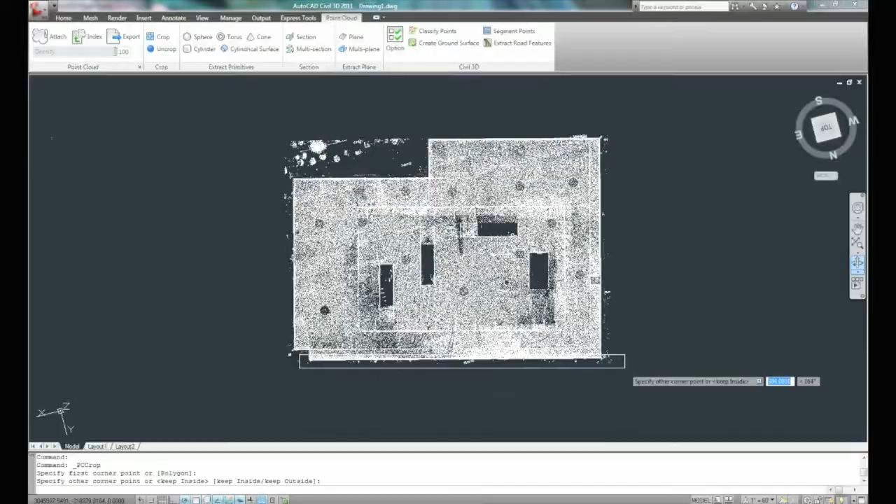What it results in is a point cloud of three-dimensional locations. And we're designing software technology to take that point cloud and turn it into a model—for instance, scan to BIM, scan into a building model, or into a part model for manufacturing.

This is the way a point cloud used to look just a few years ago. You couldn't tell if this point here is the column or the wall behind it. It was hard to visualize. But the technology has been advancing so rapidly, we can do this now.

We can experience millions of points as if they're surfaces. We can convert them into models very easily, rapidly accelerating the process. Every text tag you see here is a different laser scan from a different vantage point, and you're interactively moving through huge amounts of data. This is billions of points—they can't fit in your computer's memory.

They are being real-time accessed and streamed to your display as an interactive model, down to centimeter accuracy. Imagine entire cities at this level of detail.

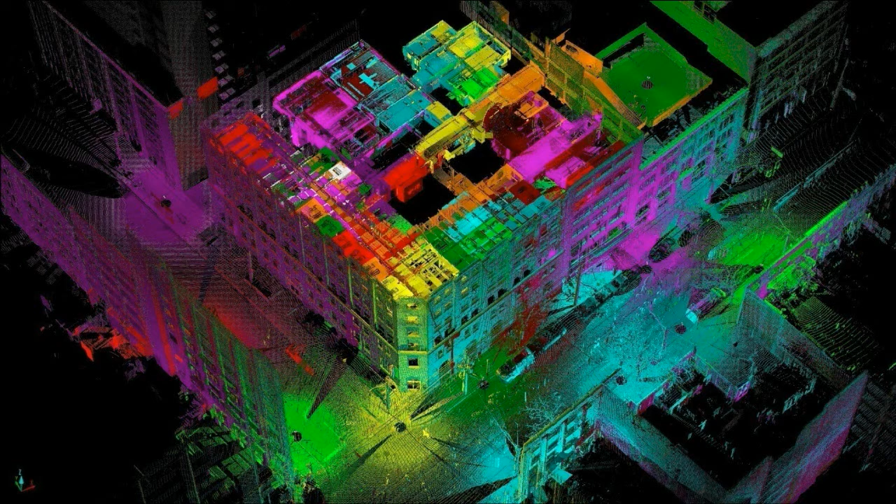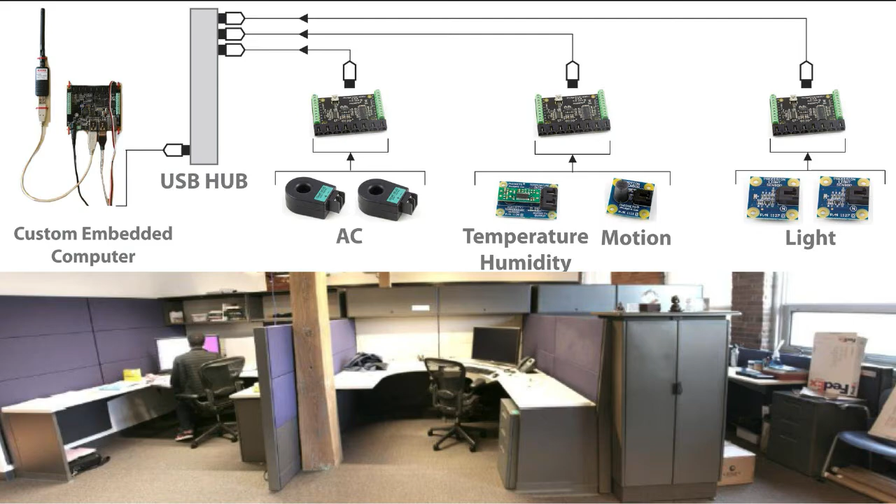One of the things we did was not just capture the geometry of an object. This is an office building we have up in Toronto, and we laser scanned it. But rather than just capturing the geometry of the building, we also put other types of ripping devices. We ripped the temperature, the humidity, the motion, the amount of electricity used at every single outlet and every desk in this entire office. We hooked it into the HVAC system, measuring all of the pumps and valves in the entire building.

It's a living building, and we're capturing all of that. What that allows us to do when we've ripped it is we can model it and do simulations and see how the air conditioning system is really behaving to make for a more sustainable design in the future.

Now, this is a device that can be used by manufacturers. It is a chip that you can plug all sorts of sensors into. It wirelessly transmits data, and it generates its own electricity parasitically through vibrations. So as a machine is doing its operation, it can power this chip without any wires, and it transmits that data.

There are people taking these chips, pouring them into concrete. So the next bridge you drive over may be a ripping device, or the next foundation in a building is literally alive with information. This ability to rip analog data and bring it into the digital world extends even to brainwave technology.

This, from the Emotiv company, is making a game device that in the future may hook up to your video game console and read your brainwaves to control the game. This is a product that's already here today.

Other ways that we can rip reality are things like this. This BRDF material scanner allows us to take a square centimeter of material and look at how light interacts with a piece of wood or ceramic or glass. In the movie industry or special effects industry, it uses that data. One square centimeter is about a terabyte of information of how light interacts with the material.

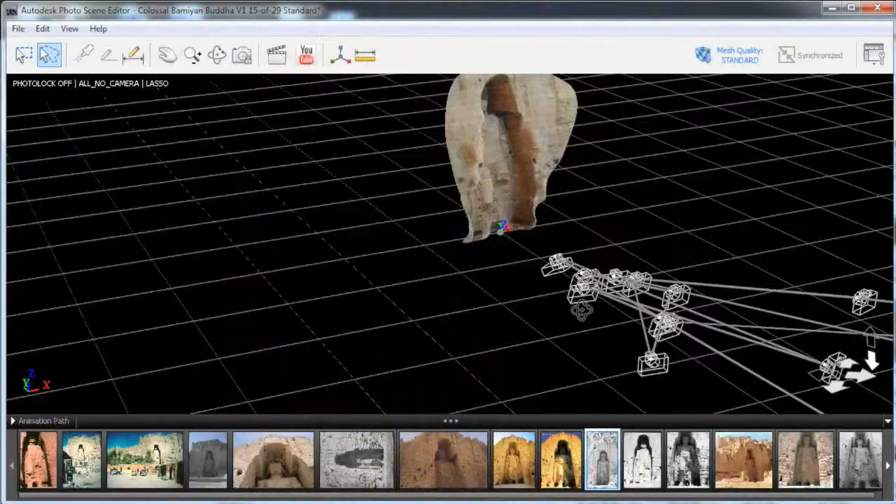We send it to the cloud, and it solves for where all of the cameras' positions were. And so what you see here is the ability, just through photographs, to create a 3-dimensional model of that structure. You can't laser scan them, but through photogrammetry technology, we can bring the Bamiyan Buddhas back to life.

We can take pictures of your foot and have custom-built shoes just for you that have perfect fit. Or take some tourist photos of Notre Dame Cathedral and bring it home with you.

The next step in this evolution is really using something that the military has had, which is drones. This is a self-flying drone. You can give it a mission, and instead of carrying a bomb payload, it can carry a 5-pound camera with a nice zoom lens.

Here you see us flying over a winery in Napa, capturing multiple pictures, and we're creating a 3-dimensional model. Imagine being able to digitize an entire city in an automated fashion. Now that technology is also being democratized down to a reasonable price point. At the San Francisco airport, I saw this in the gift shop for $300. Notice that it has a camera in the front, exactly what you need to create a 3-dimensional model.

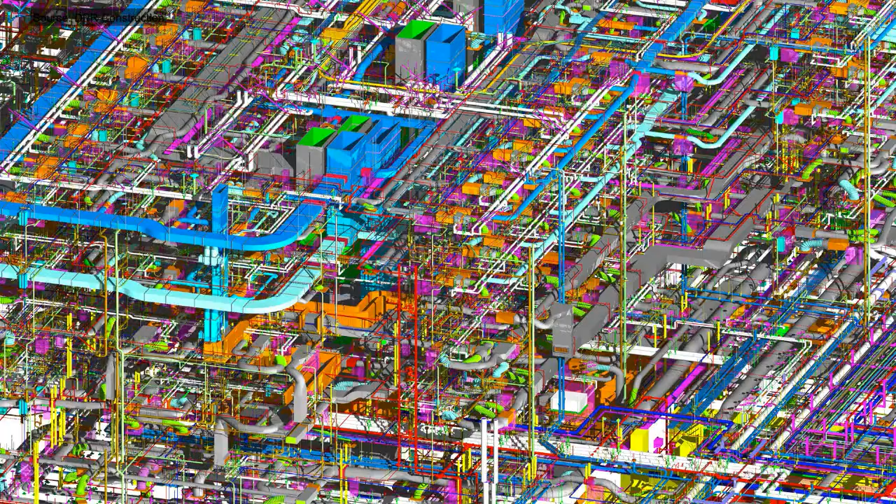So with all of this reality capture, the result is massive amounts of data. This is the kind of data that is in a CAD model for just a single wing of a single hospital in San Francisco. Imagine taking that BIM model, not just for one building, but for an entire city. And that's why things like drone capture and laser scanning and photogrammetry are all really coming together.

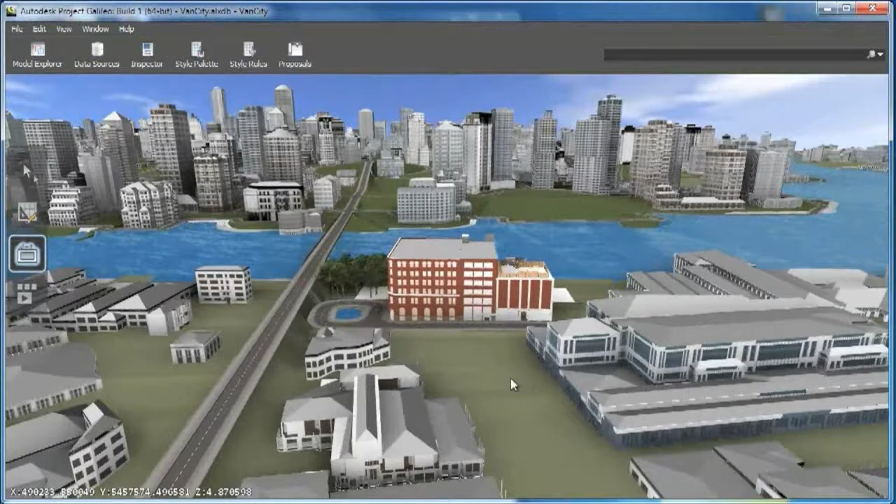We now have the technology to have these massive data sets, and that's where the cloud comes in. Because instead of just working with these big files locally on your laptop, they're not going to fit. We're going to have what my friend Doug Eberhard calls BAM models, or big-ass models, where everything is alive. You can go into the basement of the building and see the part number on the pump, on the water chiller.

How are we going to do that? Well, instead of moving data files between the different designers on the team and having data move to the people, we're going to have to move people to the data, centralizing data in the cloud, on the internet, on servers, and accessing it remotely through things like iPads or your computer.

To do that, we do it much in the same way that you can watch movies over the internet. Netflix, for example. Those systems have had a problem if they've had too much latency. They're too slow. But we have new technology that can allow us to remote video from a program running on a server in under 10 milliseconds. That's less than the refresh time of one frame of animation on your monitor.

Now that we've captured all of that reality, the next step is we need to model all of that stuff. And the cloud is really important with that. Now, I think of this as what I call infinite computing.

Let's take a sidestep. Let's talk cars for a second. If you take a Toyota Camry, it has performance X. It does 0 to 60 in that amount of time. And it costs you Y dollars. Now, if you have a Lamborghini, it costs a lot more than 2X, right? But it only has twice the performance. So twice the performance, but 4 times the cost. It's an exponential cost curve.

And the funny thing is that's true of computers. Whether you have a laptop or a high-end workstation, price goes up exponentially. Or perfume, or anything really follows this price curve. But unlike any other industry, computing industry goes through what's called Moore's Law. The price of computing goes down by half every 18 months. So for the same $1,000 computer, 18 months from now, we'll get a computer with twice the performance every 18 months.

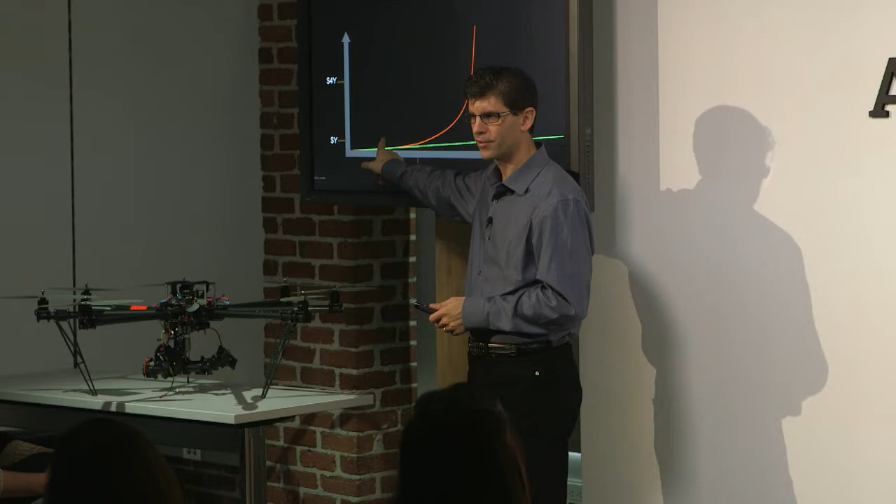This curve has really shaped the software industry. It's what allows us to do video games, where just a few years ago, we were looking at 2D graphics. The cloud, however, is linear. Think about it. I can rent one computer in the cloud for an hour for $1 an hour. Or I can rent 2 computers in the cloud for an hour for $2 an hour. I can get twice the compute performance for twice the cost. It's a linear cost curve. We've never had that in the entire 30 years of design software.

And what that means is that we shouldn't be using design software for these curves anymore. We should be thinking of the fact that our $1,000 buys us compute power over here. And so when you can afford to have a Lamborghini for the same price as the Camry, are you going to drive different? Put another way, I can have one computer do a 10,000-second simulation or visualization or analysis, cost me 16 cents, or I can get 10,000 computers in the cloud, rent them for 1 second, and it costs me 16 cents. So what are we going to do differently with that?

Well, one thing is we can actually have computers do design for the first time in history. Here, instead of doing one simulation that might take 12 hours to run to lightweight a part for an aircraft door latch, we can run hundreds of them.

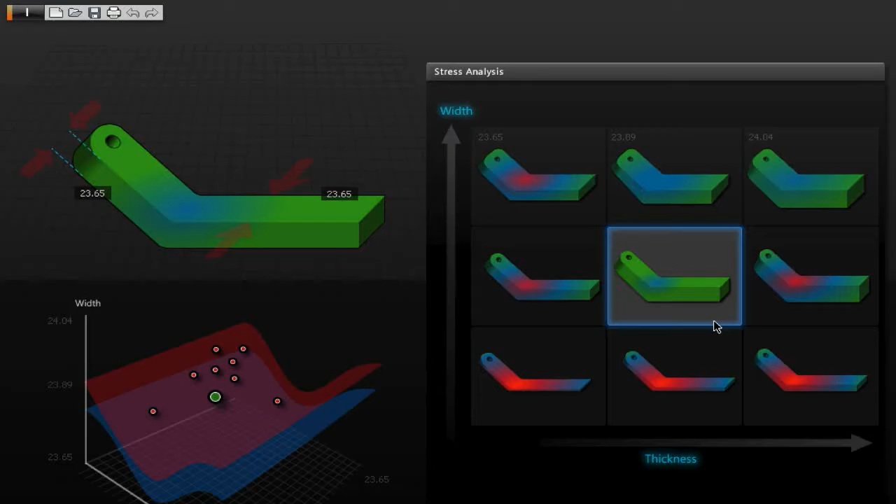Different thicknesses, different widths. We want to lightweight the part to save on fuel, but we want it strong enough so it doesn't fail. And the computer can do all of these design variations in parallel on multiple computers in the cloud that I rent.

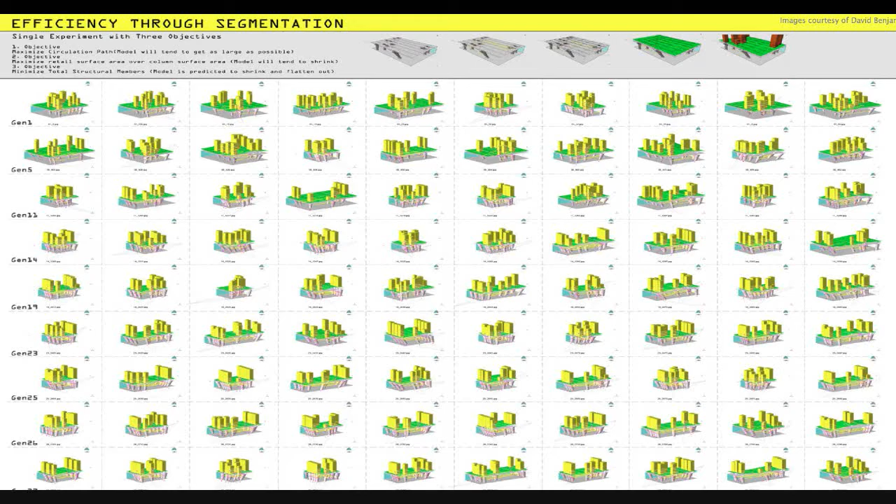In fact, this researcher did this with buildings, ran thousands of different building simulations in parallel, literally having buildings do what's called computational evolution. Think of buildings having sex, exchanging their genes, their DNA. The DNA could be the size of their windows, how much insulation they have, how they're rotated relative to the sun, whether they have solar panels or not. Those are the genes. The buildings go through a simulation to see how successful they are.

The buildings that are most successful are allowed to procreate, have children. You throw in mutations from a product catalog, swap out an Andersen window with a Pella window, and you run another set of simulations on thousands of computers. This researcher ran 25,000 simulations and ran evolution.

And what popped out was not something where the human designed the shape. The human came up with the dream, the parameters, the constraints. And it evolved to something that looks like art, or something nature would produce, biomimetic.

Now we're seeing this computational evolution happen not just on physical products and buildings, but also on virtual bacteria making virtual materials, running virtual software in their DNA, and going through evolution. This is the ability to make new types of materials that combine properties like rubber with properties like brick. Imagine being able to bring those together in an organic way that doesn't have any toxic effects.

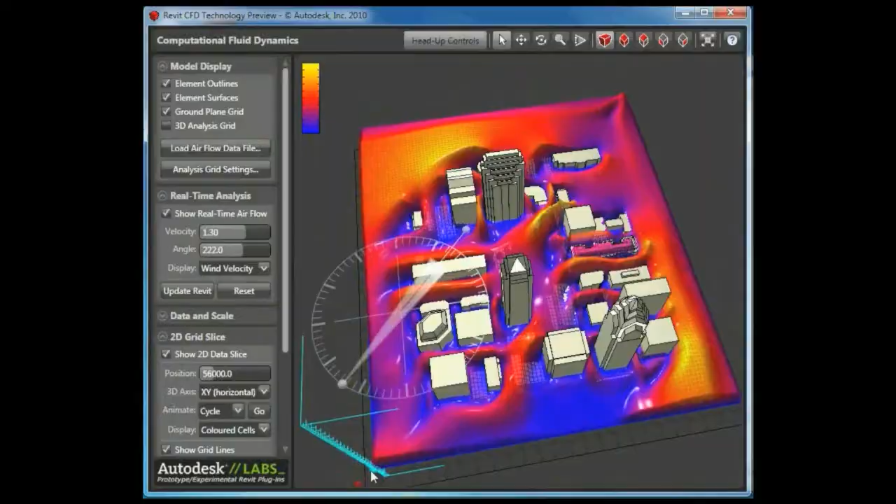We can also use this infinite computing to do all sorts of amazing simulation and analysis. Here you're seeing computational fluid dynamics happen in real time. Some of this technology was borrowed from the video game industry, where a traditional CFD simulation might take 12 hours or even a month, depending on what you're asking. But the ability to do real-time rendering using the cloud, real-time simulation, and real-time editing is really going to change how we think, moving from doing analysis after the design to doing analysis during design.

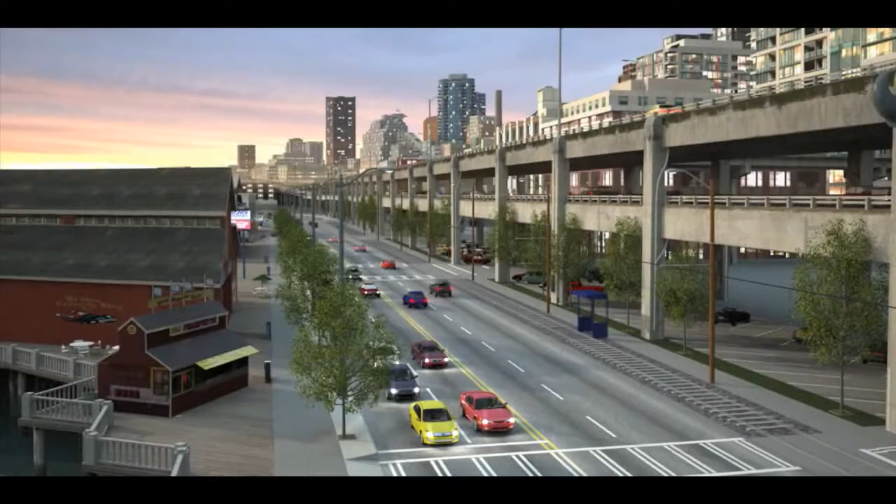In this case, a simulation using the power of infinite computing put together this visualization and simulation of an earthquake up in Seattle. Originally, the city wouldn't fund the replacement of the structure. A simulation was done by Parsons Brinckerhoff. A year later, it was funded on the ballot, and it's under construction now.

But after we've ripped reality, modified it and modeled it in infinite computing and worked on the data, our next step is to really bring it back to the analog world, to fab it, to burn it back into the reality that we live in. One way to do that is through rendering.

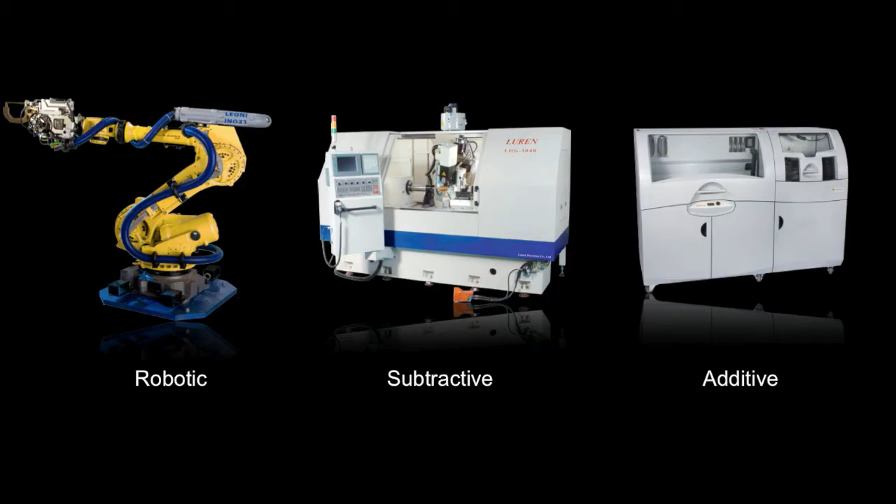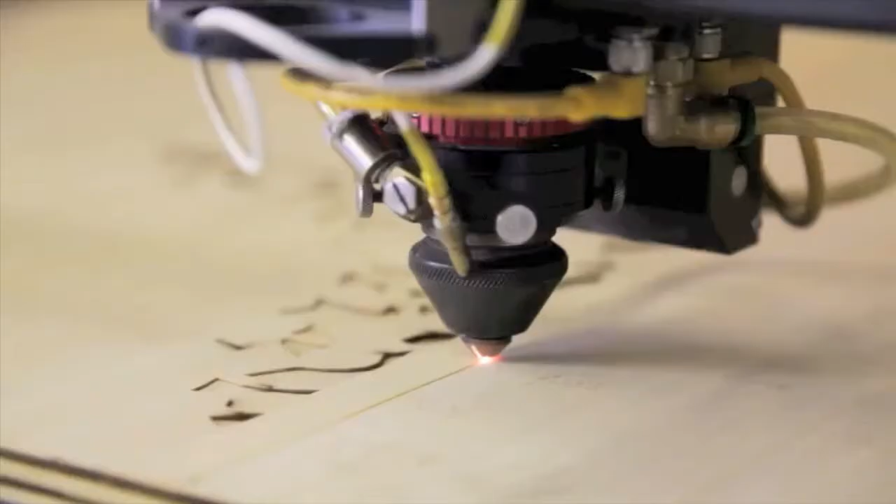But another way to bring the digital world into the analog world is through manufacturing. Of course, we've had robotic manufacturing for many years. That led to subtractive manufacturing, CNC milling machines, and so on. But there's this new exciting set of disruptions happening in additive manufacturing, or what we call 3D printing. This is a laser cutter, for example - another form of computerized manufacturing. The cost of these devices just a few years ago would be in the $250,000 range, and now you can afford one for about the price of a fancy television set.

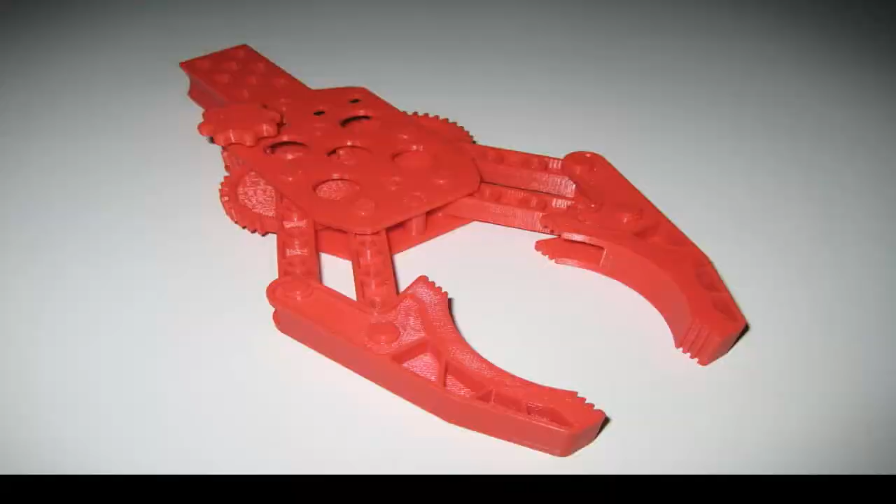You could take these digital models today and with additive manufacturing, literally print them out in 3D. They come out of the printer already assembled. The price point of these 3D printers has gone in the last 10 years from about $250,000 down to about $1,000 today. And what's really cool is, what's the first thing you would print on a 3D printer? Another 3D printer. There are over 50 different materials we can print today - everything from glass to ceramics to plastics to even biosemiconductors, which is pretty interesting.

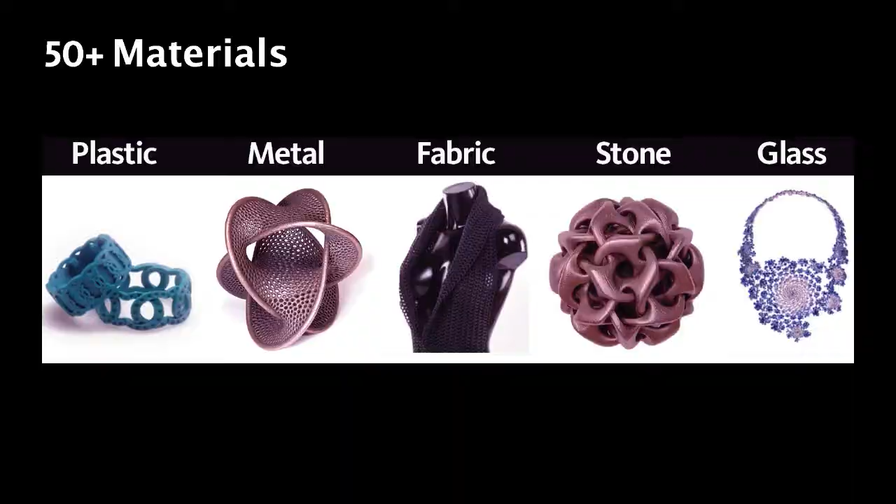You're not going to wait in line for your next iPhone at the Apple Store in the future. You're going to print it at home. So what can you print? You can print clothes today.

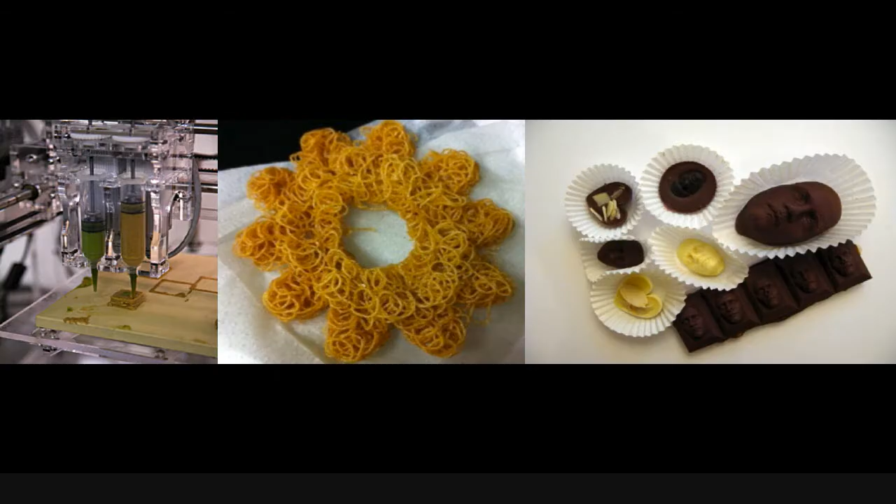You can print food. You can print a car. This is Urbee. You can even print the Earth with land XML files, a differential GPS, some laser sightings, and an Earth mover. You can literally take your CAD model and print the surface of the Earth, just as Disney does with their theme parks.

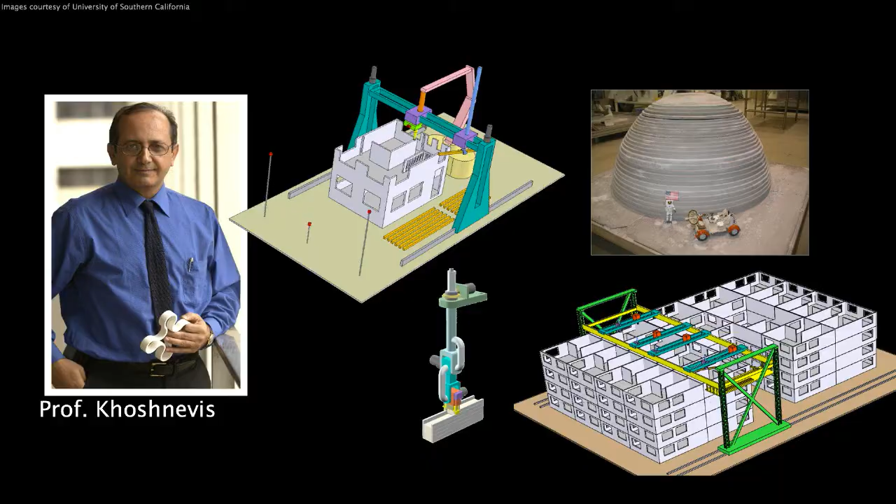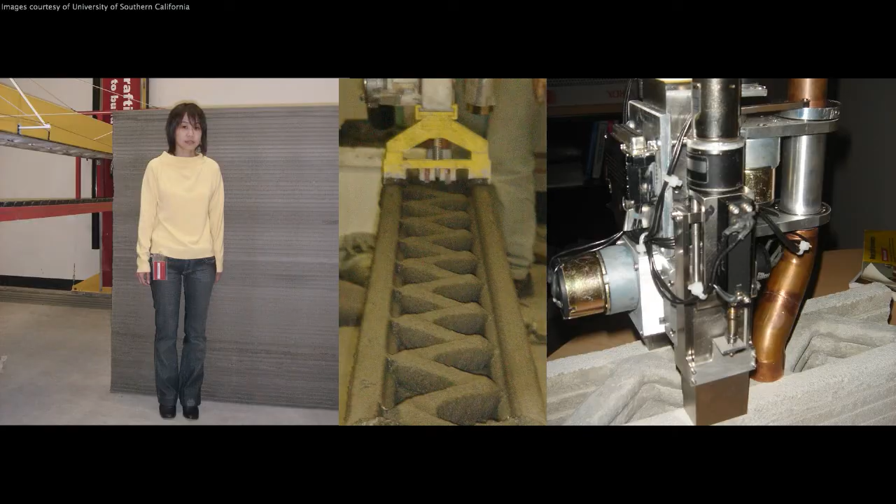Professor Khoshnevis here has printed three-dimensional buildings. The idea is NASA wants to have robots print buildings on Mars before the astronauts arrive. Here is his grad student standing in the lab against a real wall that has been 3D printed by this machine. It puts things similar to carbon fiber right into the concrete and extrudes it at building scale.

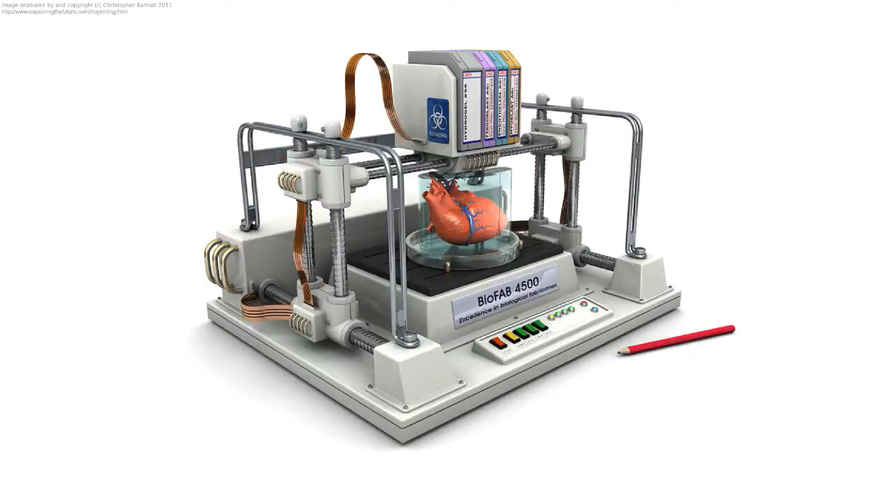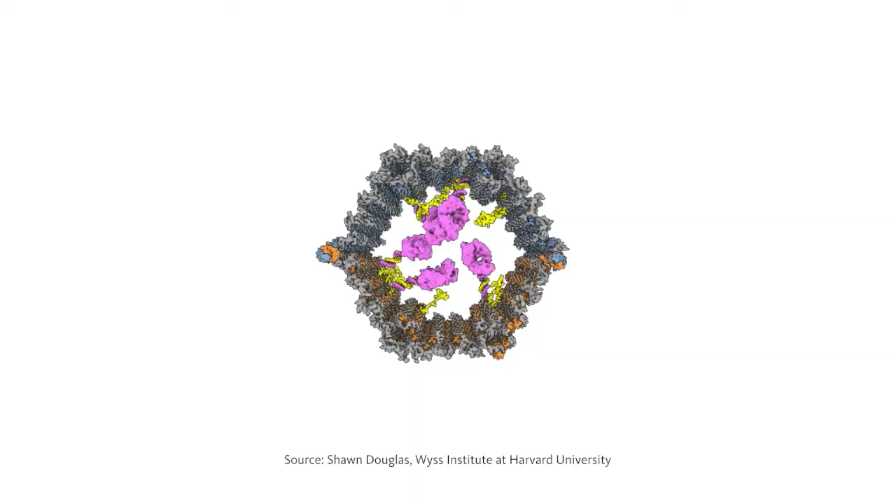This is here today. The Wyss Institute has been doing research to design self-assembling DNA. By putting the right charges on the DNA, it isn't an instruction set for a cell, but just DNA by itself, that when you put it into water, those charges make it fold into essentially a robot. The robot is a box that holds a payload, and it has a lock and a lid. You inject it into your body, it bounces around, and when it hits a cancer cell, it binds, releases the lock, and delivers the payload. Imagine being able to cure cancer with no side effects more than the common cold.

So in summary, we're seeing this wave of technologies that are going to allow us to rip, mod, and fab the atoms of our world, dramatically changing how we do design through infinite computing.

I'd like to share a personal example that really excited me, something I got to experience at the TED conference: riding in a device that combines all of these different technologies, going from analog to digital, leveraging cloud data, the use of infinite computing, the ability to visualize, simulate, and analyze, and then ultimately taking that digital reality back into the analog world. That is the Google self-driving car.